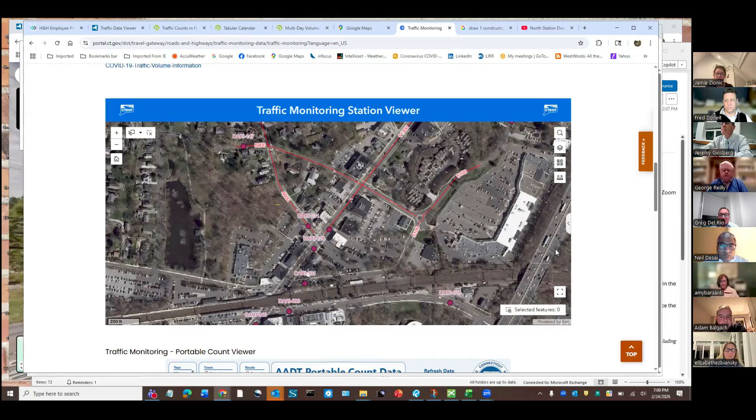So you come down here into this area, and you can punch in the station ID, which I've already done in preparation. And oh geez, what just happened? Everything was perfect. Okay, let's see if I can tag this graph and make it large.

If I - do you think guys can see it? I think we can see it. I think we're all good. Right, yeah, because when I hit that, things get wonky. So, but take a look.

This is real data from DOT's website. So in certain areas, and this is right in Boston Post Road, traffic is on a daily basis - these aren't peak hours or anything like that. So peak hours does tend to start to tell a different story. But on a daily basis, the volumes have been going down over the years a little bit. But that's not a consistent finding.

I would say most of the areas we checked in the last week, we kind of spot checked a few. We went over to Noroton Heights, we went up and down different neighborhoods. Local streets are generally down and trending a little bit down over the years, while the ramps and 95 have actually shown a different trend on a daily basis. So there's probably a little more digging I have to do to understand that. They're probably happening at different times of the day, and the peaks that happen on the ramps may be more influential. There's a lot of ways that the math works out.

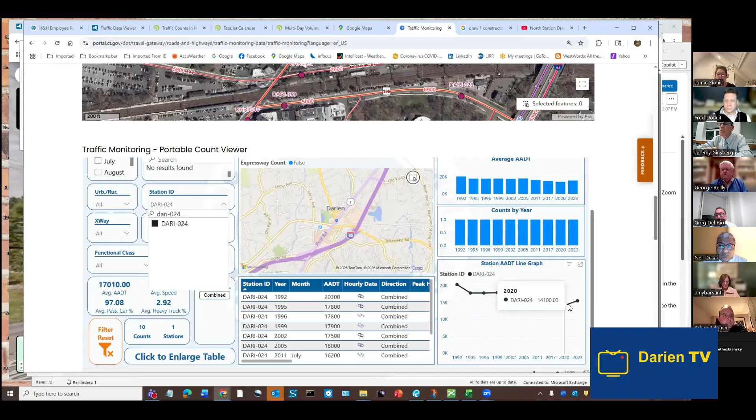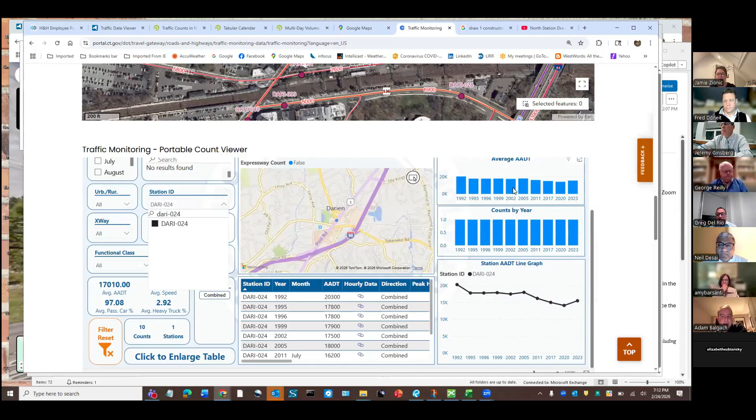But I thought that was an interesting thing to share with you guys, and I'm going to continue to look at this because I'm as surprised as probably everybody else is. But some interesting trends - this goes right through COVID, right? So there's 2020, and then we started bouncing up a little bit. So again, that's just one station. It's just illustrative of sort of what we've been looking at, not just there, but in other count locations as well.

No, I think this is good, and I think when we do sort of the interactive POCD, we should include probably like links to this sort of portal that's maybe got some stuff pre-configured if we can, because it is useful, at least in terms of traffic. Because that seems to be certainly the number one concern here, as it relates to this chapter.

One thing I specifically had in my notes when reviewing this, and it's interesting that you went straight to that, is that the latest data is from 2023. And a lot has happened in our region - Norwalk, Stamford, and Darien - where we are, below us and above us on the corridor, a lot has changed. When will these numbers at the DOT be updated?

These stations, they're all over the place - there's not a constant posting. Some of the numbers get posted at different times. So if I go to a different station, I might find something a little more recent. So they don't post these annually, clearly, because this station's information is going on the third year of aging. Right, right, right. And then if you dig down deeper into those charts and sources, sometimes you'll actually see that there's 24, 25 data, but they haven't included it in the annual number, which was the trend I was showing you.

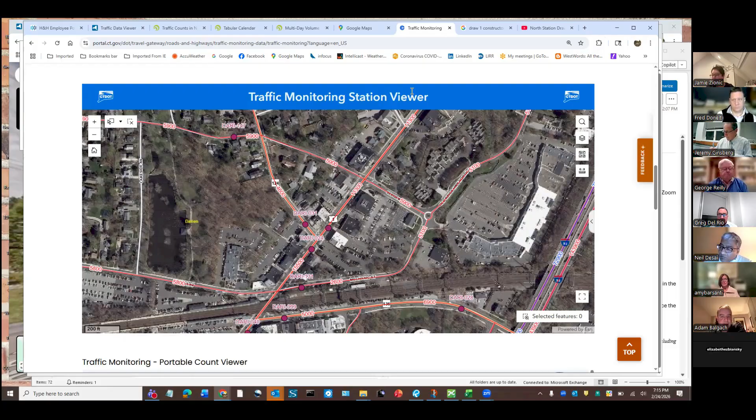I wanted to make sure that gets mentioned here as well, because that kind of falls under the purview of an advisory commission set up just to facilitate the walking and sidewalks and accessibility on foot, sort of culture around not just the downtown areas, but around the schools as well.

That's a recent creation, the Sidewalk Commission, and I think we should certainly acknowledge that in the background, and then probably maybe the way to go...

Is to say here in the recommendations to have a walk-bike committee, but I think probably to have a separate bicycle committee would be the recommendation in that case, as opposed to a joint one.

Because I think we're generally agreed sidewalks is really going to cover foot pedestrians, but cycling is really talking about road sharing and accessibility on the main arteries. We really don't want to see people riding their bikes on the sidewalks unless they're kids going to school or something.

And as far as your recommendation to combine number two and number five, that makes a lot of sense. I think I would want to somehow, 'cause there's already a lot there on number two.

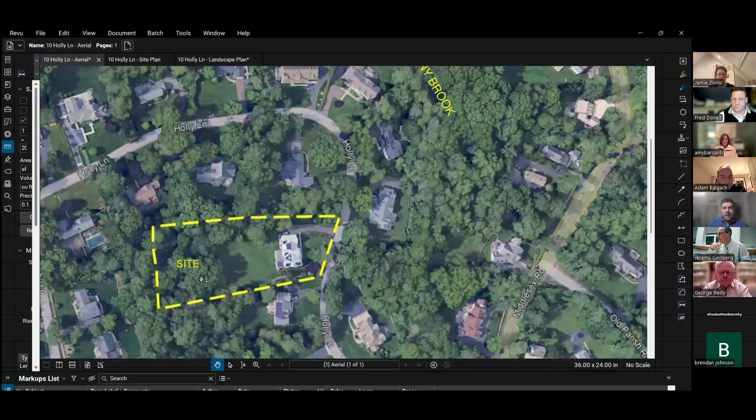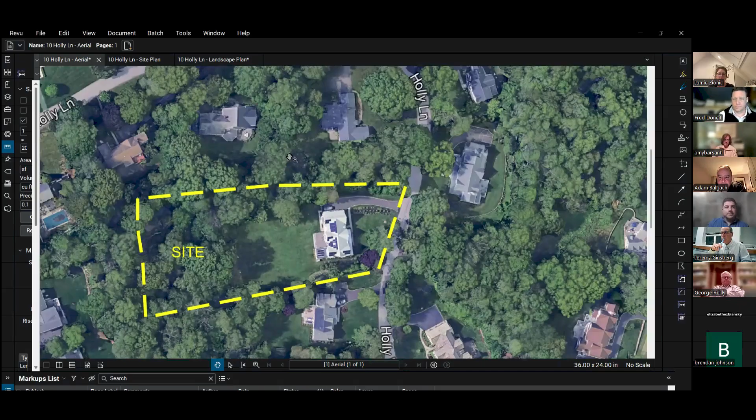Stony Brook is over here on the east portion off-site, and a portion of our property is within the flood zone. The house was built in 2019-2020, so it's a newly constructed home with a driveway. What we're looking to do now is put in an in-ground pool in the rear of the property. We did go to EPC—the wetlands line is actually pretty tight along the back side of this property, even though it's a nice manicured lawn back there. So we had to go through that and received approval from that board.

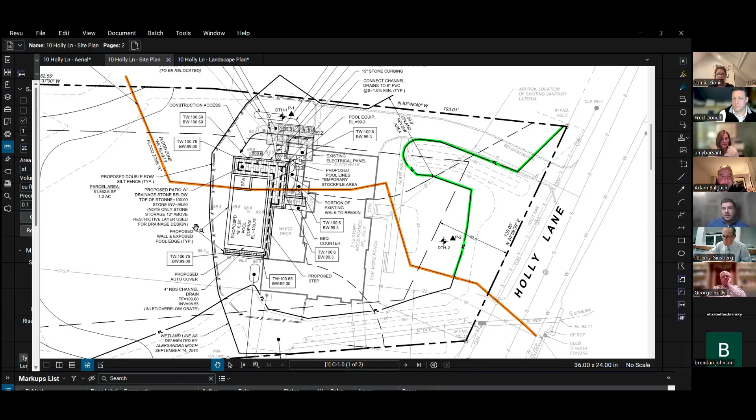Here's our site plan. It looks like the pool is going to be mostly inside of that line, though, right? Correct, so this is the wetlands line here—everything here is wetlands. And we're just inside of that, in between the house and that wetland line. So what we did here was, there's an existing wood deck that comes out of the back of this house. We're going to be able to step down off of this wood deck to basically an elevated pool and patio. The pool and patio is a couple feet above the existing grade in the rear there.

So it's basically supported by walls—this part of the pool basically sticks out of the ground a couple feet. We are capturing all the runoff from the patio areas and did a stone reservoir basically underneath the patio. So we pick up all that runoff and send it through perforated pipe and a stone layer beneath the patio and infiltrate right at the source. The drainage was designed, as you guys know, the fresh meadow approach, where we're not really removing any existing here anyways—it was already lawn. So it's for the 50-year storm event and the water quality volume, and we meet both of those requirements.

Pool equipment is located right here, and that is also elevated above the base flood elevation. In orange here, and everything north of that is the mapped flood zone line. Based on elevation, everything here in green and to the east—so basically this little portion is what's actually in the flood zone based on elevation. After the house was constructed, they actually sought a LOMA for the house, so the house is actually removed from the flood zone, even though this line is shown through it. The house has been removed through FEMA, and is deemed not in the flood zone.

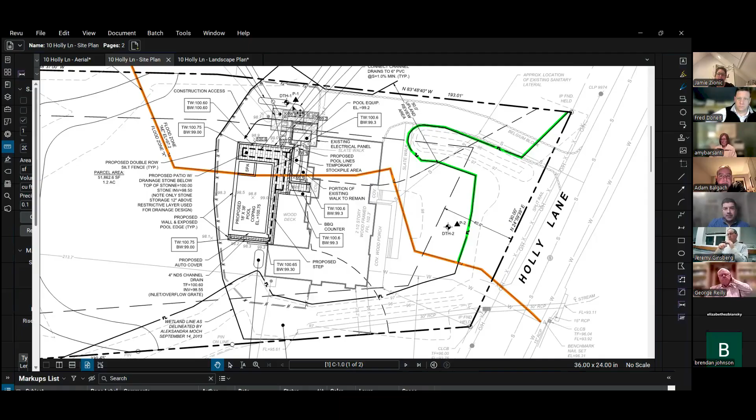We have a new propane tank being relocated in this vicinity, which services the house and will service the pool. All utilities basically come off of this corner. There's an existing electrical panel that will service the pool, and everything's basically located in this northern portion of the site.

As part of going through EPC, this is where that wetland line is. We did a pretty extensive buffer planting, so we enhanced the buffer that is currently there. There's a little bit of a buffer here that was put in when the house was built, and we're expanding on that buffer around the whole perimeter. This will also help with water quality of the lawn areas to provide even additional treatment.

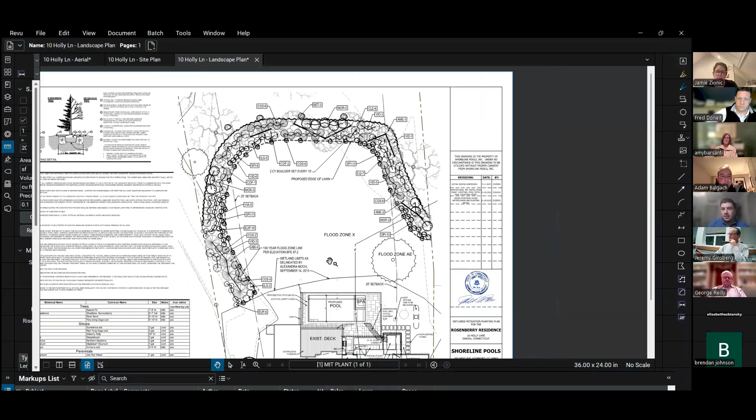The fence, we originally did have one, but we had the automatic cover, which suffices for the code. As part of the EPC proceedings, we actually removed that fence because we had it navigating through the wetlands and they weren't happy with that, so we took that out. That's pretty much it in a nutshell, so happy to answer any questions.

Thank you. It's a pretty straightforward application, like Fred said. We got sign off from the peer reviewer, so I'll open it up to the commission.

I'll just read off my screen, so I don't know where everybody else is, but I'll start with Jamie, who's on my left, and then work my way right. I'm good, thank you. Amy, you're up to bat with any comments or questions for Andy?

Sure, my question is, what if the auto cover regulations change and you require a fence? Then we would have to go in for a fence and most likely would end up just around the pool, not going through the wetland like we wanted to. We'll revisit that at that point, but because the code was that, we took it out. We didn't even fight or argue for it. We just conceded. We'd probably go back and if the code changes, we'd probably have a stronger argument to try and get it back into the wetland. Worst case scenario, we could just put it right around.

So you do have an option that would not be contingent upon EPC approval? Correct. Got it, all right, that's what I wanted to know. I mean, we'd still need EPC approval because we're within their jurisdiction, but not within the wetland. Got it, yeah, understood.

George? All set, thank you. Okay, great, so that's kind of it. I think we've crossed all our T's and dotted all our I's from a commission standpoint. This is a public hearing, so I will open it up to the general public if anybody would like to speak on behalf of this application. You can try the react, raise your hand, or come on camera, or just say you'd like to say something, and we'll happily take public comment here.

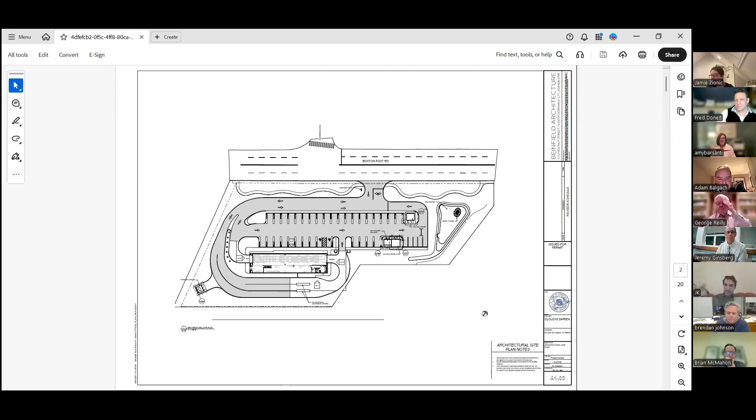Jeremy summed it up nicely. Cloud 10 is finding that in some of their other locations where they have these mat washers on the outside, exposed to the elements, when you have a real winter the machines don't function as they're intended to. So for the Darien location, they want to put those mat washers in an enclosed structure so that on a day like today or tomorrow, when you're washing your car, you can go ahead and clean your mats. The mat washer is displacing one of the vacuum spaces that we had originally contemplated, but we had an oversupply of those.

So there'll be 33 spaces for customers to vacuum their cars still if they want to. And the good news, from a code compliance perspective and engineering perspective, there's no impact on building coverage or site coverage—all well under what is permitted in the SB zone.

Unless you folks have any questions or comments for us. My only question, and then I'll open up to the rest of the commission, is just to verify—is this building going to be staffed at all?

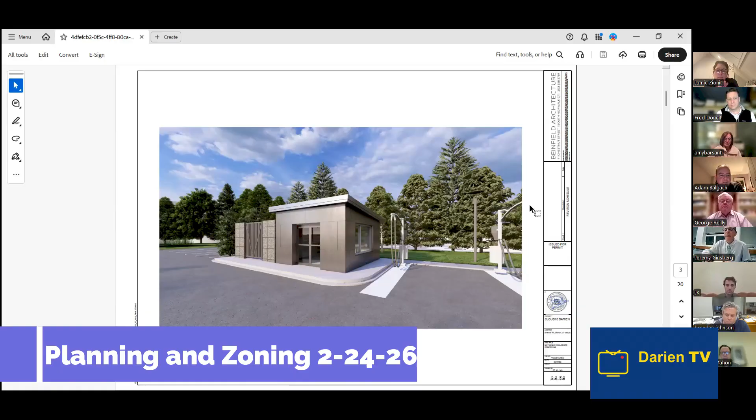The standard—is it going to close at dark? Just how does that work, because an open parking spot is a little bit different than an enclosed sort of building, kind of off in a car wash type of thing.

Yeah, you want to get that? Oh, Brendan, go ahead if you want to answer that. A couple things—hi, I'm Brendan Johnson from Cloud 10.

The picture that you see there is a little darker than it should be—that's just the architect wanted me to tell you. It's the exact same, it's to match the building. You'll even notice there's a little slant in it. Those doors are automatic open, like when you go into a hospital, they automatically open. They're sensored because people are carrying mats. So they'll be locked at the end of the day.

The obvious question probably someone's going to ask is, why didn't you put this on the original plan? And the answer to that is these mat washing machines—think about it as a super high speed dishwasher for your rubber mats and carpet mats—didn't really exist 2 years ago. We just started putting them in. The clients love them, our customers love them.

But as all of us know, this is the first real winter we've had, so we've had to shut them down because they freeze, and I have a very unhappy group of customers. So before we finish this, we said let's put this building in so that we can keep it open all year long and heated. It'll be locked at night, locked with the rest of the building.

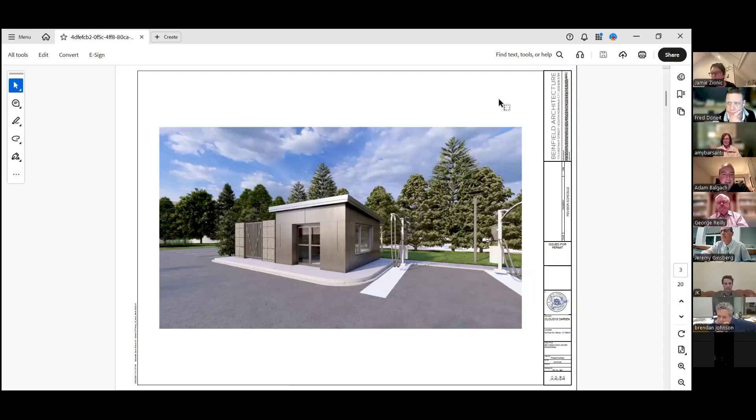Yep, so this is just the general meeting. I'll take a quick straw poll, show of hands from the commission, who thinks this is a good idea. We don't have to do anything formal, but if you think this is fine, just give a raise. I see 1, 2, 3. It looks like Steve's raising his hand there. Yep, all right, so I think it's 5-0. I think you're good. I think you've got your mat washing building there. Great. Thanks so much, everyone.

Appreciate it, thanks a lot. I hope your kid's feeling a little better. Thanks.

Okay, great, so that concludes our general meeting for the evening. We do have a number of things that we should deliberate and potentially make a decision on, so we'll start off with the first application. I'll read these into the record just for good nature. This is the business site plan application 313, the special permit application 344, PL 25-120. This is Heights Corner LLC, 90, 100, 108 Heights Road.

This is the proposal to redevelop the property as mixed-use residential commercial, and perform related site development activities, including construction of parking, public plazas, installation, landscaping, lighting, stormwater. The applicant proposes to construct a 3-story mixed-use building, commercial space on the ground level, and 21 one and two bedroom dwelling units on the upper floors.